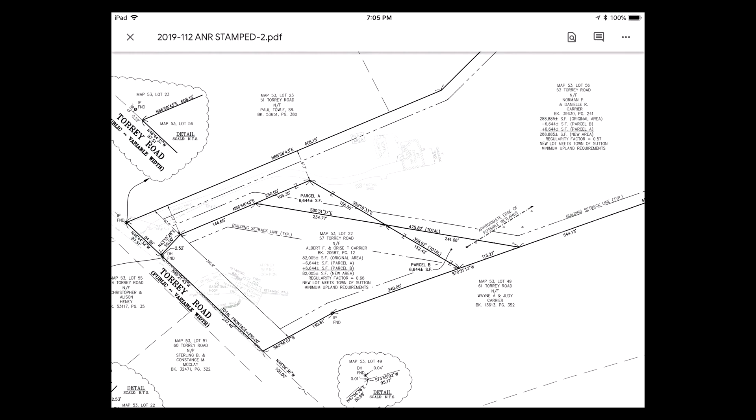The only thing we needed to add was a reference to the covenant, which has been added to the plan. So the chairman is the only one who needs to endorse that Form A, and we'll just insert the date from the covenant in that little blank before you endorse.

Okay, so just two motions: a motion to endorse the covenant, which basically says this now revised retreat lot shall never be further divided, and a second motion to endorse the Form A plan dated — what's the latest revision date? November 4th. There you go.

Make a motion to endorse the covenant. Thank you. Your second? Second. Any further discussion? Nope. Hearing none, I'll call for a vote. All those in favor? Aye. Opposed? Abstained? You got it.

Alright, so there's the covenant, so now I just need the motion to endorse the plan dated 11/4/19. I'll make a motion to endorse the plan dated 11/4/19. I'll second it. Thank you. Any further comments? Hearing none, I'll call for a vote. All those in favor? Aye. Opposed? Abstained?

Alright, so just the chairman needs to sign the plan and insert the date of the covenant on the little line. If you can't find it, I can do that. And then everybody needs to sign the covenant. Only the chairman signs the plan. So that's right: covenant, everybody; plan, chair.

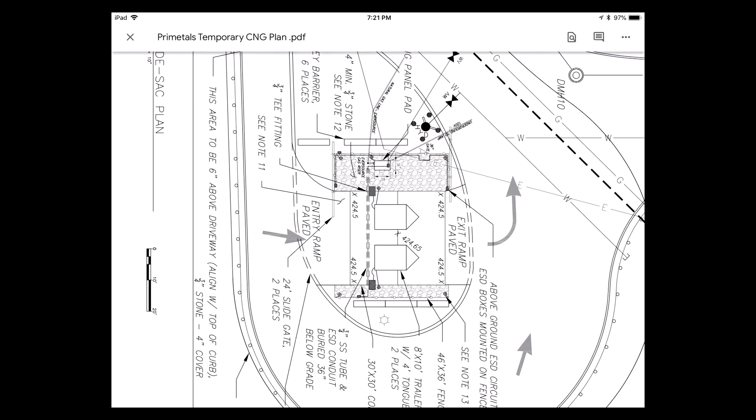So what you're seeing here is, you'll recall, there's the public Gilmore Drive that goes to a cul-de-sac in front of New England Disposal Technology that was accepted by the town. Then there was an extension, which is private, which goes all along the frontage of Primetals and serves as legal frontage for Lot 10, which is IBA. This drawing is of the private cul-de-sac.

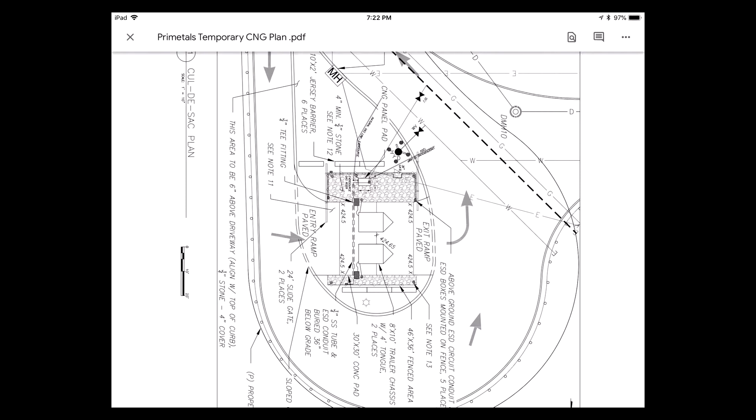So the proposal is for a temporary compressed natural gas installation that would pipe directly into the same connection that the permanent gas line will pipe into. Basically there would be these 2 trailers located fully protected by fencing and bollards and all the other things the fire department has called for. Those trailers are full of compressed natural gas tubes, 6 to 8 tubes, hooked into a panel, and they offload to the panel where the compression rate changes, and it's fed into the building to power and heat the building and the equipment within.

I did send you an image of the size of one of these, you can see they're not very big, pretty small. They anticipate that, depending on the heating season and the power draw, maybe once a day or once every other day a pickup truck would pull in, drop a full container, latch to the empty container, and pull it away. So you'd have a rotation once or so a day. Once they're up and operating, you may have these rotating out each day. This is a temporary installation. My thought is that it definitely does not need site plan approval.

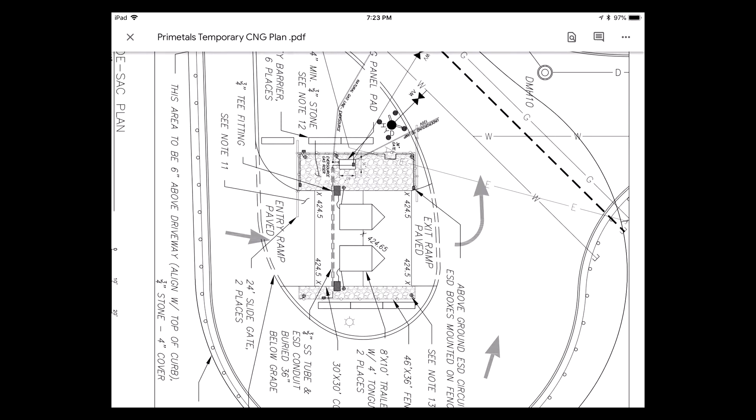You can decide if you want to waive site plan review, or treat it as just a temporary use as approved by the fire department. But I wanted to make sure you're fully aware of it. This is a temporary change to a site plan you've approved, and I wanted you to understand why it's there, how long it's there for, and what it's all about. I also provided you with emails and correspondence from the fire department approving the whole installation after significant consideration and filings.

I didn't give you the whole rest of the file, which has all the specs on absolutely everything inside this little area. So do you think it needs a site plan waiver? Do you think it's just a temporary use, no big deal? Or are you just good to go with fire department approval?

The building department I checked with said it's not a building code issue. They're aware of it, they sat in on the meetings. The highway department - this is a private road up here - said thanks for letting me know, but they're not maintaining this part of the roadway, so they're fine with it.

One of the requirements before this becomes operational that the fire chief put in place is that they'll have training here, so that everybody on the crew - a certain core number - have to attend, and whoever else can attend, to become familiar with the compressed natural gas hands-on. So they'll be doing training down there before it goes live.

So temporary is how long? It should only be till August of 2021, but having been in the power industry for many moons, it could run a little bit longer than that. Their grant doesn't run much longer than that, so they've got a finite window in which they need to spend $2.3 million - this is a $6 to $8 million line project.

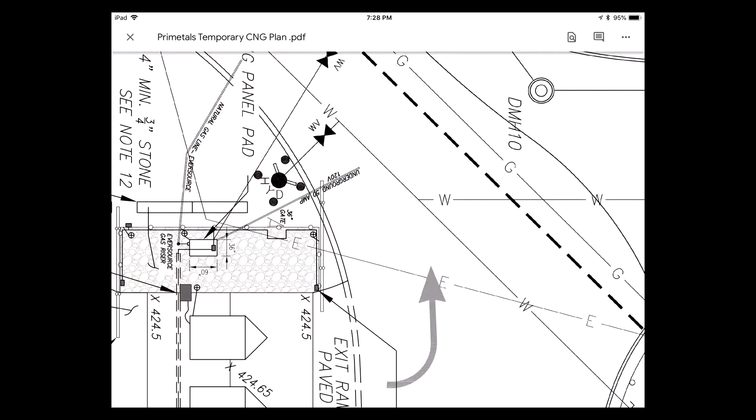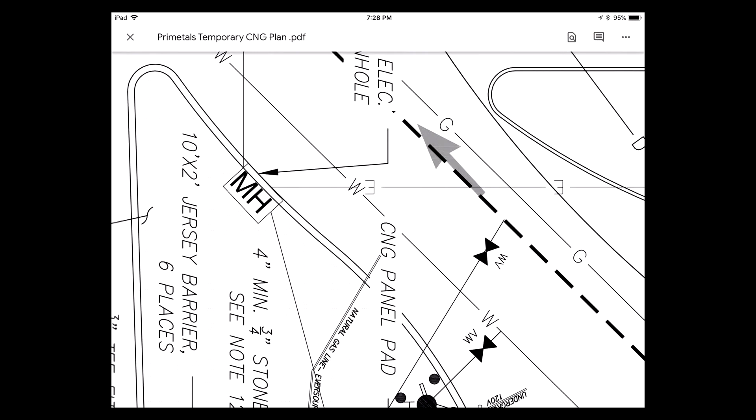That's where the CNG line runs, the dry gas line. See the G right there? So what they're doing is tapping into it, the natural gas line. So when this is all done, this line will go away, and the center of the island will be finished as it was approved in the site plan. You'll just have gas flowing through that normal dry gas line as it was always meant to do. There'll be no surface visual after these go away—you'll just have a nice little cul-de-sac with grass or whatever we expect to go in the middle of it.

Any concerns from the public? Okay, that gives you what we need. I have correspondence under general business, but I think we should go to the 7:10 public hearing, and come back to that stuff afterward since that's just board business. Let's have a public hearing for a site plan review for 1016 Galaxy Pass. It's a car wash. Alright.

Good evening, for the record my name is Patrick Doherty. I'm a professional engineer with Midpoint Engineering and Consulting. I'm here on behalf of Baracus Development—normally I'm here on behalf of Galaxy Development. Tonight I'm here on behalf of Baracus Development with both modification of site plan and special permit approvals for phase 3 of Pleasant Valley Crossing. Also here tonight is Tammy Baracus, the owner and operator, and Jay Gallant from Gallant Architecture, who has the building design.

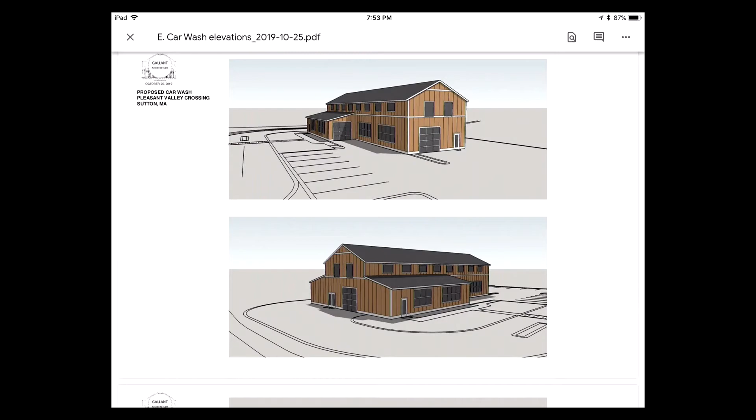The idea here is to create a two-story building where, as Patrick said, the main part of the car wash is 110 feet, which will allow full service. There's actually a similar facility we visited in Rhode Island, and it's really nice. I've been to a bunch of different car washes, but none as nice as that one, and this is going to be nicer than that. So it's a really good thing, as we've talked about tonight.

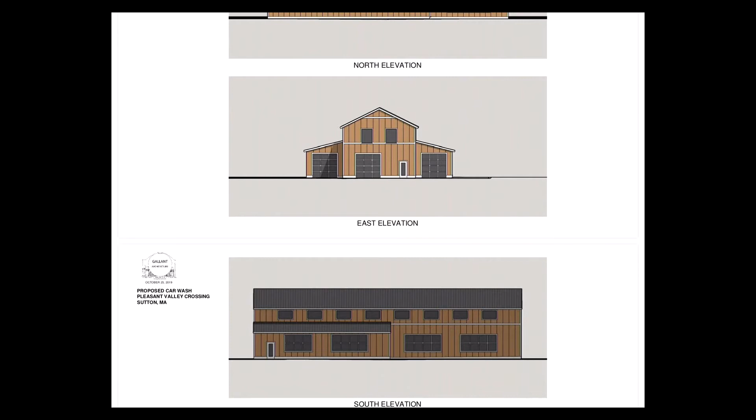And there's an adjacent equipment room where all the different pieces that run the car wash itself will be directly adjacent to it. Then the detail bays on either side, and then a nice little lobby waiting room, a comfortable area where people can wait generally to have their detailing done in their cars, but that's the general reason why they would be there.

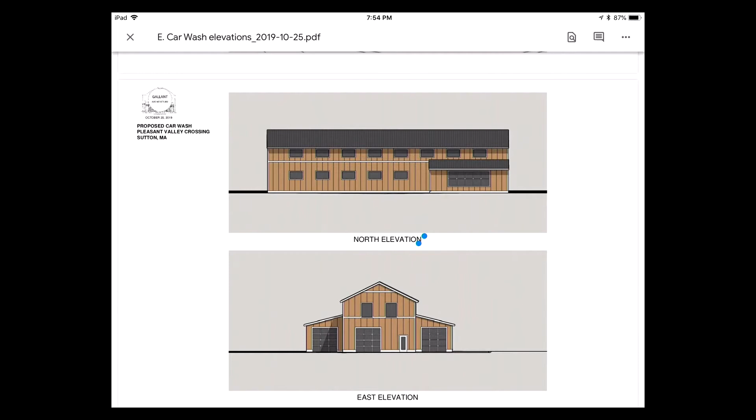And then on the second floor, for part of it, an office for the folks that own and operate the car wash, so that would be facing Galaxy Pass. In this drawing here, Galaxy Pass is right here, so as you drive towards Starbucks, Five Guys and Market 32, you'd see the entrance to the car wash where you drive in, and that's where the sign would be.

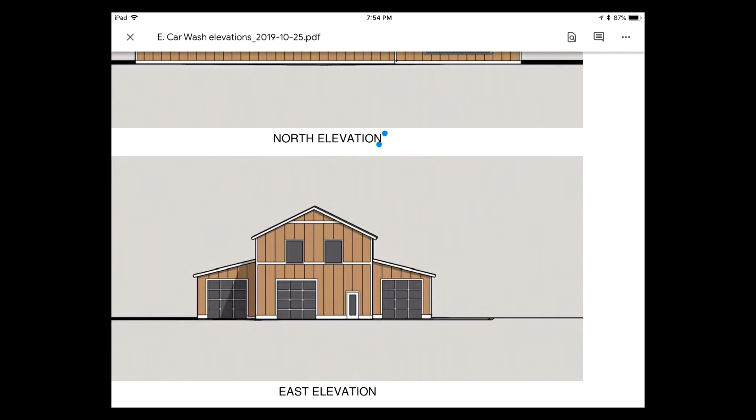It didn't come out very well on this printout, but right at the gable facing the street would be a fairly simple sign, just 75 square feet, not fancy lighting or anything, just simply stating what the car wash is, and some simple lighting around it, lots of glass, trying to really create a nice, attractive building that'll say what it is, but not in a real aggressive way.

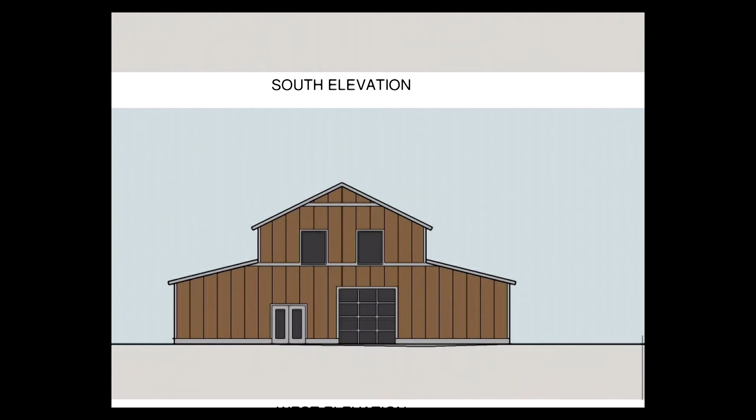And I'm just trying to also keep that same language around the building, so facing Pleasant Valley Road would be the detail bays, with glass doors and windows. Again, just trying to have a nice, elegant concept that'll highlight the existing buildings that are there, and that's the idea.

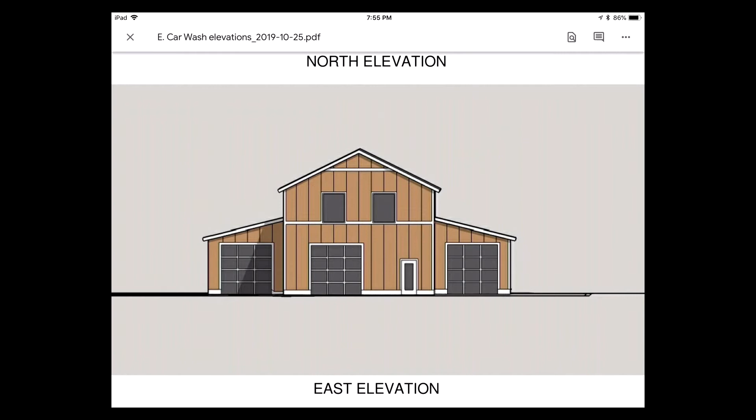Any comments from board members? Well, I would just say, when I originally saw the pictures, it's really nice looking. I mean, it doesn't look like a car wash. I thought it was a nice looking design, to start off with.

Anyone else? I'm sure you went back and forth with him on it a little bit. I'm sure you did. I worked with him in the past, so he kind of knows where I'm gonna come from anyways.

I did beat him up on throwing some stone in there somewhere, so it ties to the other buildings in the project. And the darker color he's talking about, I assume, is an homage to my comments that the color of this building should kind of tie to the panels on the front of the grocery store a little bit, just to try to tie them together.

We've got a disconnect going with the dialysis building, not really going with other things, 'cause the Market 32 is a pretty inspiring building, at least with some of the uses of materials, so trying to work with that. So that'd be my one comment, was how's it gonna tie in with all the other buildings there? You don't want something that looks way different than everything else there, but I think it looks nice.

Good job, Jen. On the board, we've always put pressure on — well, when we created the overlay district, one of the things we fought hard for was to make sure that people had a sense of Sutton and the Blackstone Valley when they came into Sutton. We wanted things to look like they belonged here.

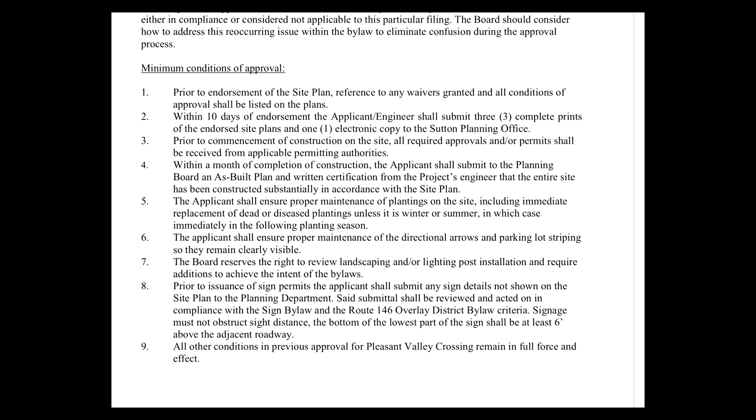I make a motion to grant a special permit for the Route 146 overlay amendment, having previously found that it meets all the criteria in the 10-page long bylaw, the 146 overlay bylaw, with the minimum conditions that the applicant shall ensure proper maintenance of plantings on site, including immediate

replacement of dead or diseased plantings unless it is winter or summer, in which case immediately in the following planting season. The applicant shall ensure proper maintenance of the directional arrows and parking lot striping so that they remain clearly visible. The board reserves the right to review landscaping and/or lighting post-installation and require additions to achieve the intent of the bylaws.

Prior to issuance of sign permits, the applicant shall submit any sign details not shown on the site plan to the planning department. Said submittals shall be reviewed and acted on in compliance with the sign bylaw and the Route 146 overlay district bylaw criteria.

Signage must not obstruct sight distance. The bottom of the lowest part of the sign shall be at least 6 feet above the adjacent roadway. And all other conditions in previous approvals for Pleasant Valley Crossing remain in full force and effect.

Now you decide if you want to do site plan review. If you want to do site plan review, you have to add number 10, that it's contingent on the zoning board granting the special permit for the use. If you don't get the use, all is for naught. But that's up to you.

So what was in the submittal is the gambrel you're talking about, right? And this would be the second floor, right? And you would maintain the two parking spaces, or a parking space and storage there. It looks like two parking spaces on the first floor. And that would raise up the structure to a higher height, so it would kind of look like the house. Correct, you can kind of see it behind the tree there. You've got that same roof line on the house as would be on the proposed garage.

So now you want to do something different. We were thinking that if we were allowed a waiver for that 50-50 split, to have the living space on the first floor, and leave the second floor as is for storage and garage space, which would reduce construction since we'd just be closing in the first floor, and more importantly, the outside would remain the same look and preserve that look. Also, building a gambrel style seems to be a very large building, and I don't think it falls in line with the guidelines of treating it as a supplemental, additional, smaller building, not like a separate house on the same property.

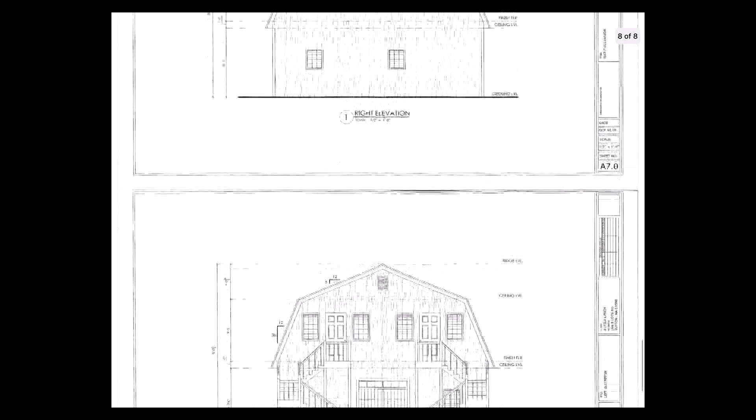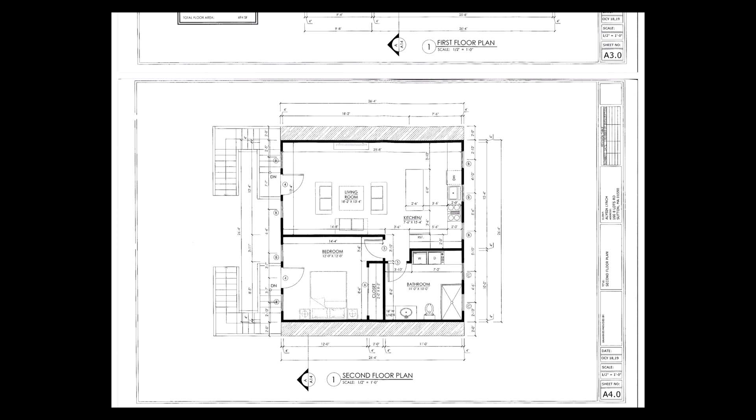We would definitely be in the back of the house, obviously. We'd need two egresses if the apartment was on the second floor. So it got us thinking, could we move to the first floor and not have so much disruption in the style, first of all, and just the overall look of the structure? So we would be able to access it from inside the apartment, or put one set of staircases to the second floor.

Recall Zach was here at a previous meeting, and he talked to you just to see, before they filed, if the board could be supportive of shifting the lot line. So what you see up on the screen is what Zach discussed at the last meeting with the board.

So you're not changing anything on the ground. The road is constructed, it's in, they're just shifting the lot line. You'll recall that the night we talked to Zach, we had an aerial that showed a clearing that already exists. This shifting of the lot line would allow the house to shift forward more, away from there, in the direction of the bend, so that house will have a backyard.

You don't need to do really more clearing or anything. It will sit nicely on the terrain as it exists now, in the clearing area that exists now. So it's really just a move to utilize everything as it sits.

The assessors submitted some comments about the shed being in the front setback, among a few other things. And then I did submit some comments about - I don't know why, but we did not waive granite monuments at McClellan Road, so those either need to be put in or that needs to be waived. I think the assessors made a similar comment to that as well.

And then I did note that if that cul-de-sac loop actually touches the line of the adjacent lot, it creates this unbuildable little blob right there. So you might want to just incorporate that whole thing into the bulb of the cul-de-sac, so it kind of looks like a golf club without that little indent out of it.

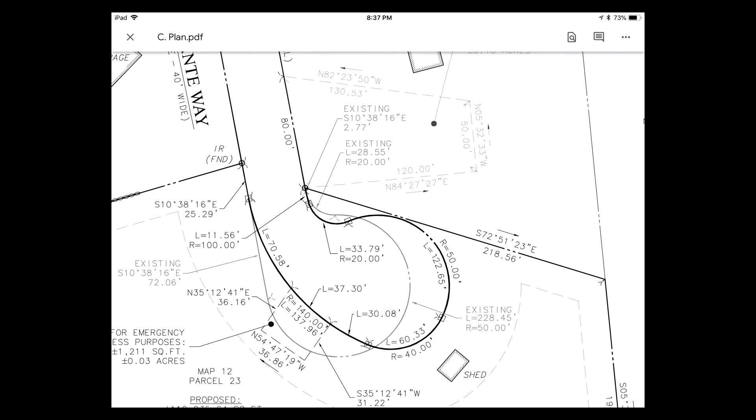I hadn't talked to Zach since I made that commentary to him, but it just seemed - if it doesn't touch the line, there needs to be a blow up of what's going on against that lot line. I believe on the revised plan, there is that, at least on the copy that I have.

All right, let me see - zoomed in on this one, it looks like. You can see it on that? I don't have it. There seems to be a space between the two shown lines, a blow up of where he's leaving - 1.26 feet, yeah, just so that we're not creating a separate parcel.

I would just incorporate it to the bulb, but I would be open to either way. Maybe more people have comments on that than I do, or preferences on that.

So it's only not even 1.5 feet between the edge of that line and that lot line. So it is still a contiguous lot. There's that weird thing about your lot not supposed to be less than 50 feet between there and the rear lot line. It's kind of hard to tell where the rear lot line is on this lot though.

So that was one of just the one minor comment I had on there. And then they just needed to show the width line, confirm the existing shed will be moved out of the front setback. And then there were just waivers that were missing on the previous plan.

I did not take a look at that revised plan. And then I think the assessors had some comments as well - they had 14 comments. I think I addressed some of these with the assessor.

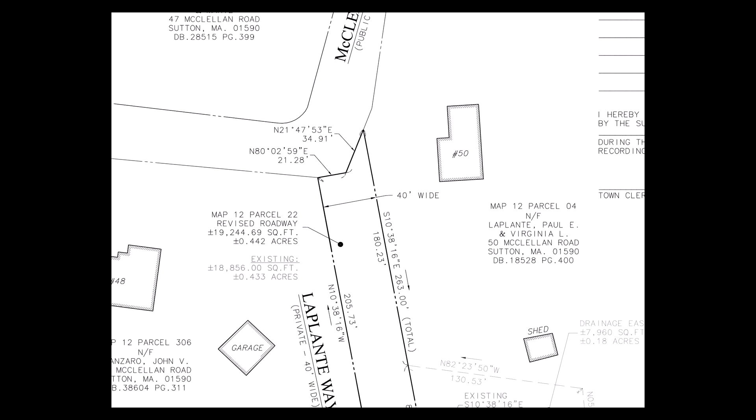And the pins, are we referring to at the corner by McClellan Road, where the entrance to the easement is? If I'm not mistaken - I'm not a surveyor or an engineer, neither am I - I believe they did find a pin at the entrance on the right-hand side, over to here in the easement, it's right up in this area. I know that we initially staked the setbacks of where the house would need to be, and the surveyors at that time found a pin there.

Oh wait a minute, are you talking more into the lot now, or up on McClellan? McClellan Road, this is one of the pins that they found. Alright, yeah, it's just not marked, but I don't have the most recent - does the most recent plan show any iron pin found or anything? Do we have the most recent? Yeah, that's the one that Bob's holding in his hand.

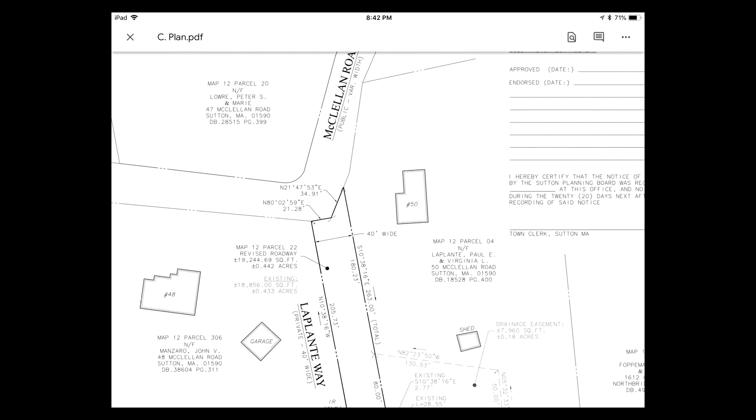Take a peek here, does it show iron pin found? No, it doesn't show it yet, so you might have found it but it's not marked as found, so he did make the monument symbol though on both those corners. So you're saying in your discussion with them, where those monument symbols are shown, you would request concrete as opposed to granite.

Yes. Alright, so you would need to vote that waiver. And then the locus should not include map 12 parcel 4 - that was taken out of the locus.

Shed location - what's going on with the shed? Moving the shed out of that setback? The shed will be moved at some point during construction.

Alright, lot width is now shown, I believe - let me just check, yeah, lot width 41330, so that is now shown. Item 5 is the labeling of the dimensions of the old cul-de-sac, so those have been taken off - I tend to concur, so those have been removed.

What is the distance between the cul-de-sac sideline with the 50-foot radius and - yeah, you were asking the same question - what's that space there, 1.26 feet. So what do you think about just including that blob in the right-of-way, or are you good with 1.26 feet? I'm just pointing out that there was a very small distance between those two lines, that you'd have to calculate to determine what it was, and you end up with a little piece of land that you can't get to without going over the road.